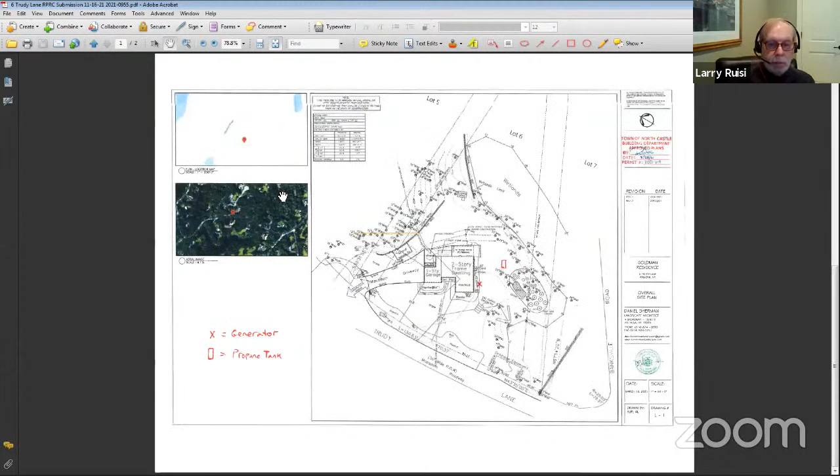Okay, so what we are talking about here is a new generator at the X and a propane tank with the rectangle. We recently approved an expansion to the patio a few months ago, I'm guessing, if I recall. So now they're asking to put the generator in. You can see the wetlands over here, so obviously both these items are in the buffer. I don't have any real concerns about it. The generator has to be suitably screened. They have to mark the distances to the setbacks to make sure it complies with the town code. But given the limited impact here and that it's lawn and we approved the patio, we should talk about what the approval authority should be for this wetlands permit.

I think it would be an administrative wetlands permit, but George, do you have any thoughts or comments on this one? Well, we've been fairly accommodating on these matters - there's such small intrusions. And I guess the question is the propane - they just rest there, is there a platform, is there a concrete padding, what do we do with it? I believe usually they put it on a concrete pad, but yeah, I would assume that would be the case. Okay, they're not buried? Some are buried. Here they didn't say it's buried, so I'm assuming it's not. But the impacts are relatively the same - if they bury it, it gets buried, if it's on top of the ground, it's there. Either way, I think it would be acceptable.

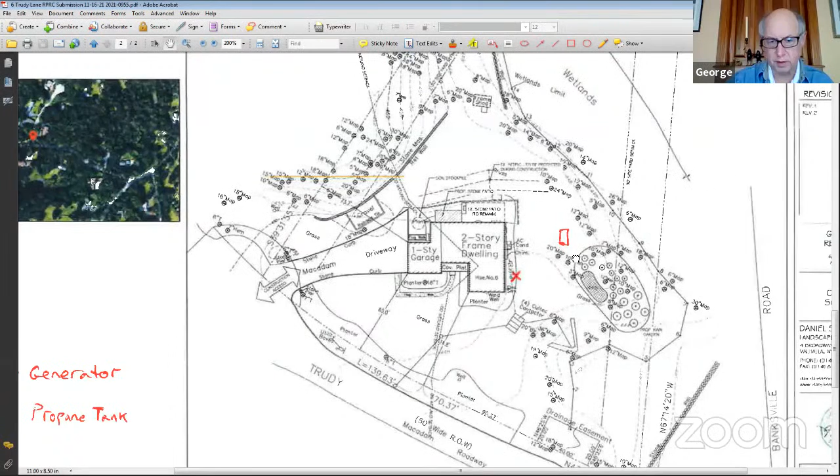Okay, and the distance from the pad, the tank to the generator itself and the house? Approximately, I guess the tank is about 50 feet to both, and then the generator is a few feet off the house, like 6 feet - is that the code, I think? Yeah, I asked them, they have to identify what that distance is, but yeah, that would be my guess. Okay, well given the lack of enormity of this project, right, I would say we should go forward with it, with an administrative wetland permit. And with the building department? Yes.

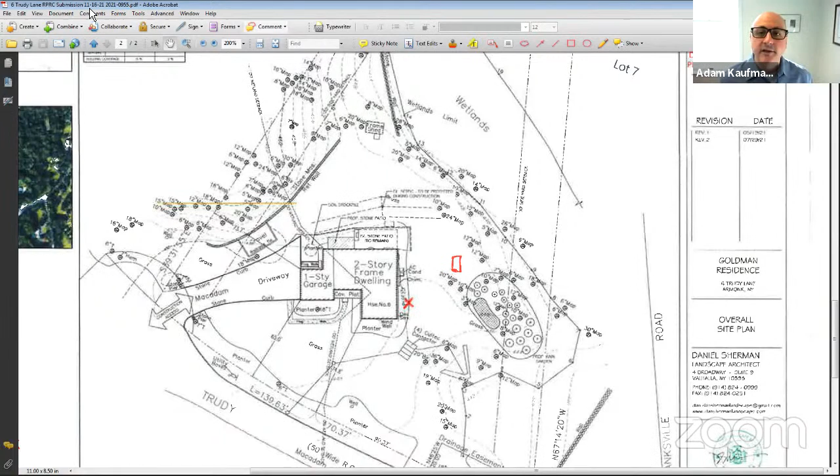All right, next is 18 Windmill Place for a pool, and we have Alan Pilch here. Yes, so let's let Alan in. Alan, you're up - you're here for 18 Windmill, right? Yes, I am. Okay, great.

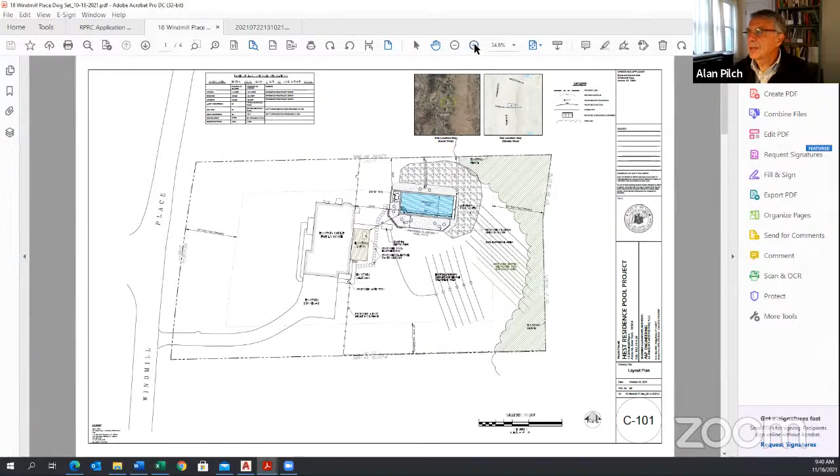So do you have the plans that you could share with us? And if you do, take the committee through what's being proposed here. Yes, great, let me share screen. Is that visible? Yep, okay. So what's being proposed here is a pool, just in the rear yard of the property. I'll just expand this a little bit.

A pool is being proposed in the rear yard of the property, surrounded with a patio. The pool itself is 20 by 50 feet, and you can see the pool coping. A spa is also being shown on the plan, along with a grass area. That's the setback line, set 30 feet from the property line.

We're showing an existing walkway from the single family house to the deck, and a bluestone paver walkway set onto the ground to provide access from the existing bluestone walkway to the pool. There's a small retaining wall that will also be constructed here, only a couple feet high. There's a septic tank here, and the existing leaching system is here - this is the 100% expansion area. That's pretty much what's being proposed.

I'll show you on the second sheet the grading plan for it, showing what's being proposed. There's a short wall here. Some of the material removed from the pool in order to construct it will be placed on the east side - Windmill Place is on the left. We are providing a slot drain around the perimeter of the pool to pick up the runoff and convey it down to chambers in a brushy area of the property.

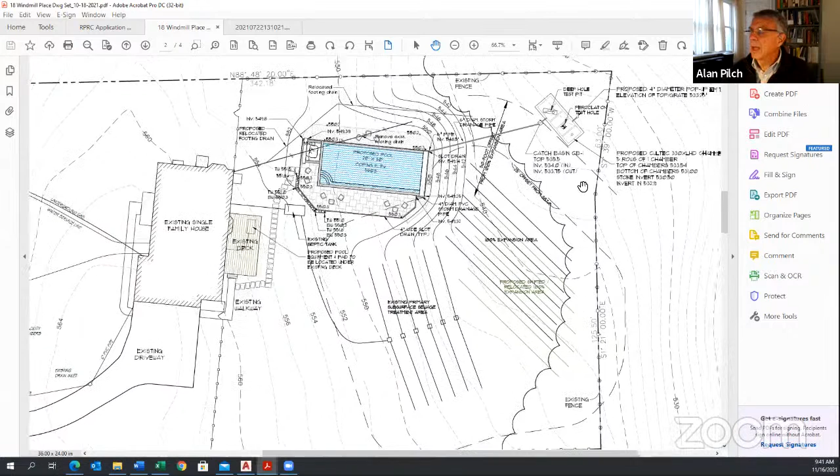Last week we conducted a deep hole test here and found very good soils, and we're conducting a percolation test on Friday. That's the plan, so that's really it - another pool project, of which I'm sure there have been plenty. That's what's being proposed here. There's no changes to the house being proposed at all.

No changes in the front yard. It's all the activities occurring in the back.

Alan, is it heated? Is the pool heated? Because I don't see a propane tank anyplace. It's a good question, I'll have to ask how we're going to do that. I presume it probably would be.

Right now we're showing the equipment underneath the existing deck - you can walk underneath that. There's so much grade change from here; the deck is pretty high compared to the house. But that's where we're showing the pool equipment pad. I'll ask that question about the propane tank, I presume it will be needed. If that's the case, we'll show something probably in this location here.

Are you taking down any trees for the propane tank? No, it's actually in a lawn area where it's completely lawn. You won't need to take any trees down, Alan, for the infiltrator? I don't think so, really - it's kind of a brushy area with trees surrounding it, so I really don't think so.

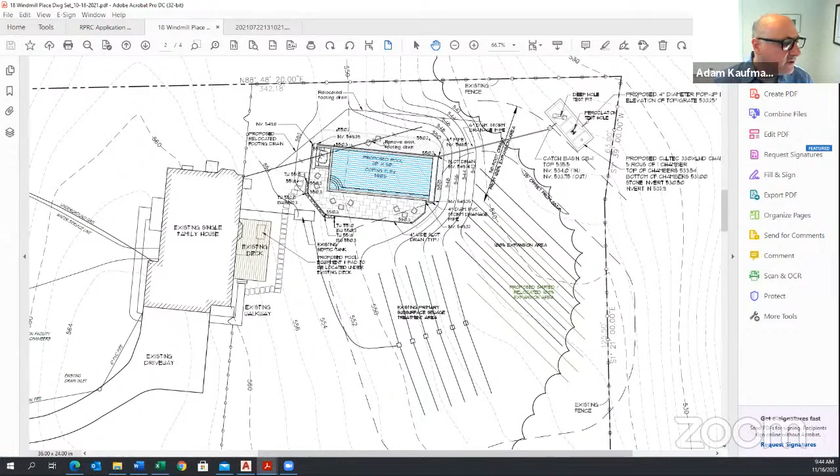Okay, what happens - you know, why don't you stop sharing and I'll just show some pictures of the property so the committee can understand.

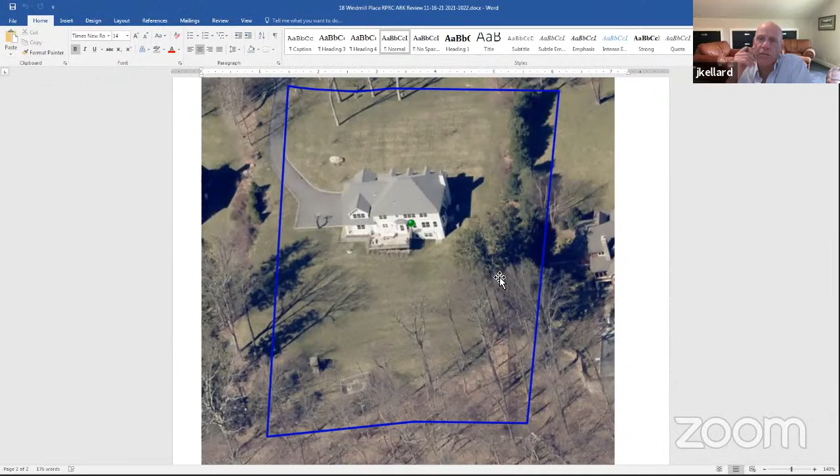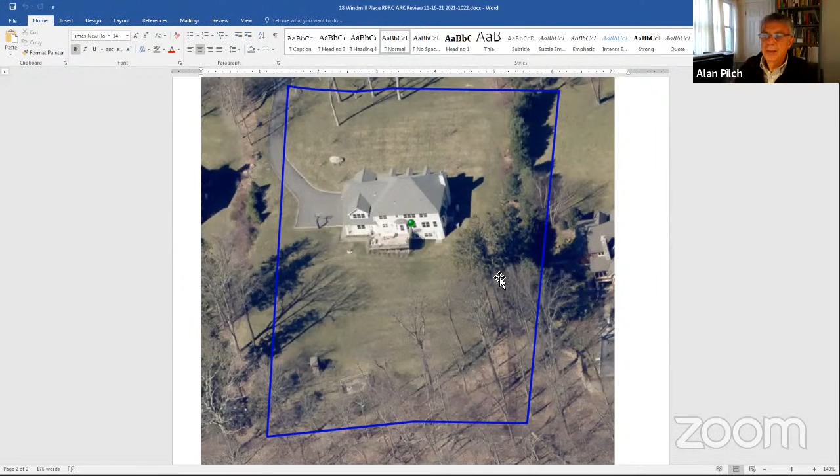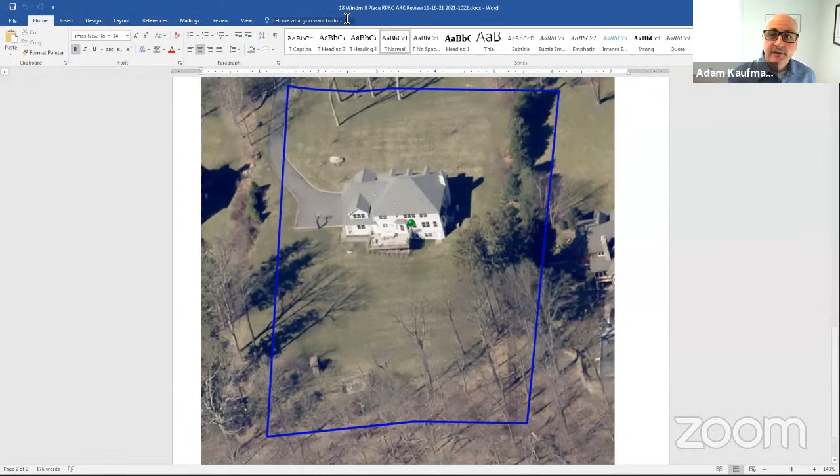Next we're moving on to Delwood Farm Way. I see that they're also waiting here, so we'll get them in here. Okay.

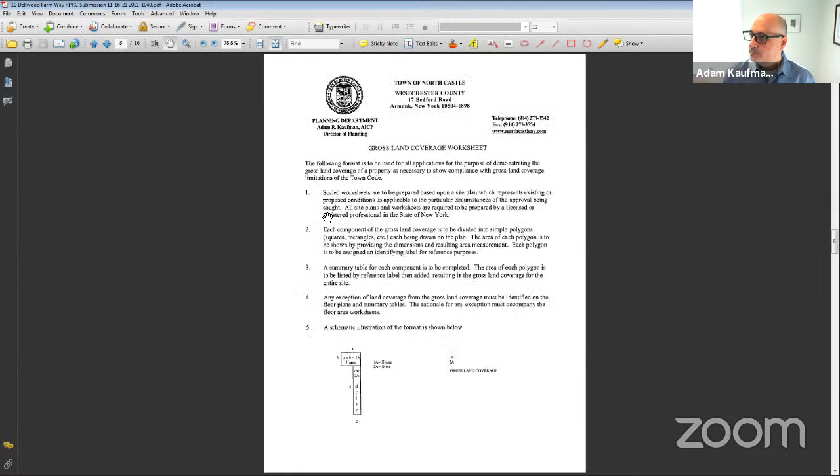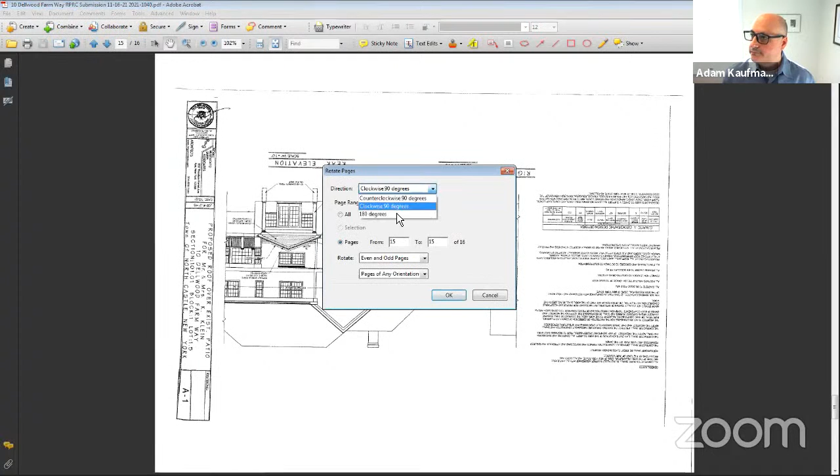Ah, okay. All right, Charlie, let me have Mark's drawing please. Okay, so that's essentially what's being proposed: lower level, covered porch over an existing patio. Correct.

It's going to have 2 columns, and the rest will be attached to the main house. It's going to be in line with the existing deck, and I think it's like 12 by 14. It'll be open. The only thing we might do on one side, the porch side, is a hanging partition for a flat screen TV that's not on that print, but basically it's just open air, a gable end with the 2 columns.

Yeah, I don't have any major issues here. I have some technical items on getting an updated site plan, showing the setbacks and getting land coverage addressed. You know John, I don't know if you noticed, but there's some improvements to the rear of the house in terms of the terrace that weren't on the original site plan when we approved the lot.

This was part of the Hammond Ridge subdivision, so I don't know if there are any stormwater implications there, but whatever.

As I saw it, the roof was going over an existing patio. My point is that patio was never reviewed at that size. At one time it had some treated lumber, 6x6s, and stairs that rotted away, so we basically recreated what was there, but we did make it a little bit bigger. It was during the time of COVID, and that's basically what we did there—we also did some shrubbery and stuff. It doesn't go past the existing porch, and it's open air.

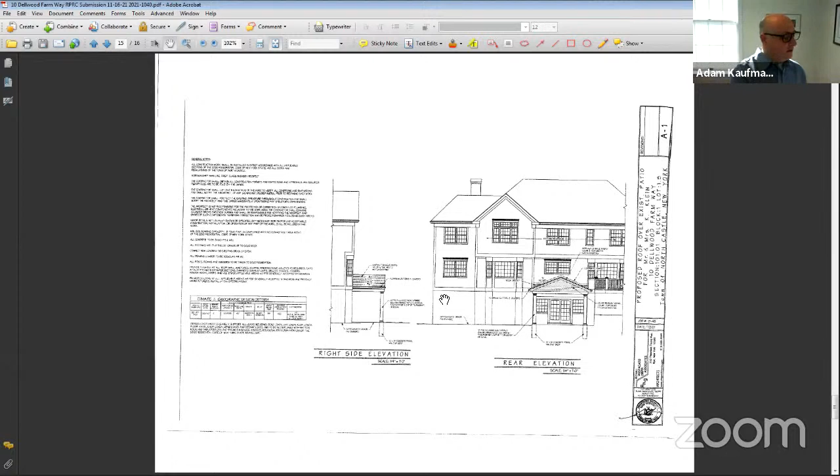Hold on there, how do you turn this off now? It's all right, I'll put you back. My tech skills aren't that good. All right, good, so we'll just wait for the building department.

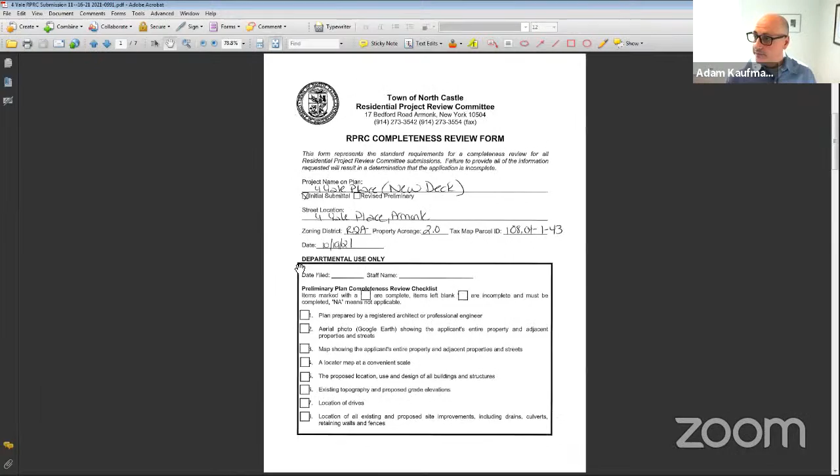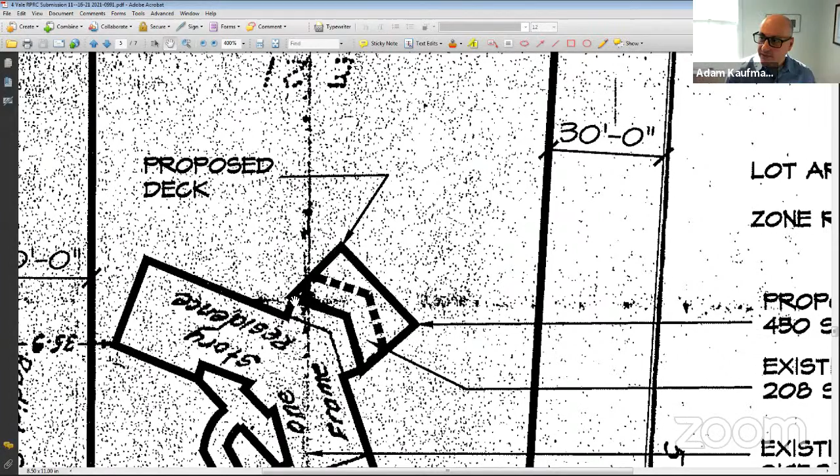So what we have here — let me zoom in — is an existing at-grade patio represented by the dashed line. They want to eliminate the patio and put in a new deck, but it gets a little bit larger and there are some grade changes, so this becomes a deck rather than an at-grade patio. I don't really have any issues with what's being proposed. Let me just pull up...

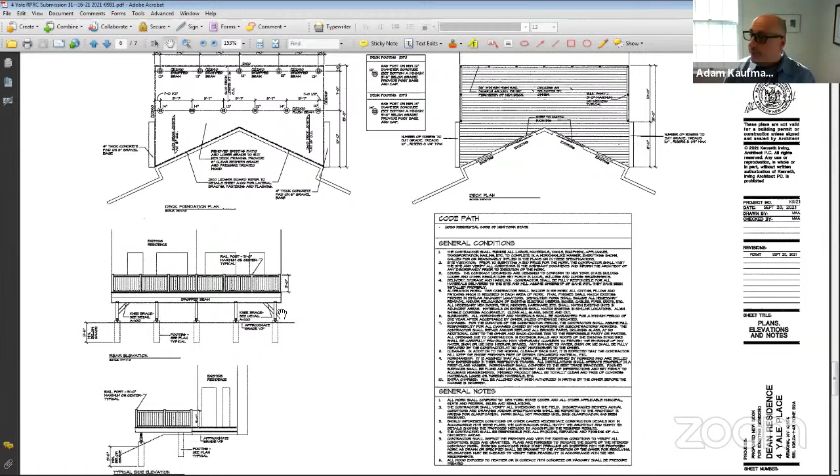It did look like it was in the wetland setback — local, and possibly state wetlands. Exactly, state and local. The proposed deck is slightly larger. RPRC should determine the appropriate approval authority for the likely required local wetlands permit, and possibly DEC. I have some technical comments on preparing the plan, but we need to determine how this wetland permit should be reviewed.

I don't think it's a significant wetland impact since we're only talking about the footings for the deck back here, but you guys should discuss it. It looked like they only had 11 sonotubes they were putting in. How do you feel about that, George? It's really in your wheelhouse here. I love sonotubes — if that's all there is, then I'd go forward with it.

I'd say, given the sensitivity here, this should be an administrative wetlands permit that John's office reviews just to make sure everything is okay. Is there some consensus on that? I'm fine with that. Okay, so then I'll make a motion: send to building with an administrative wetlands permit, reviewed by the town engineer. I'll second. All in favor? Aye.

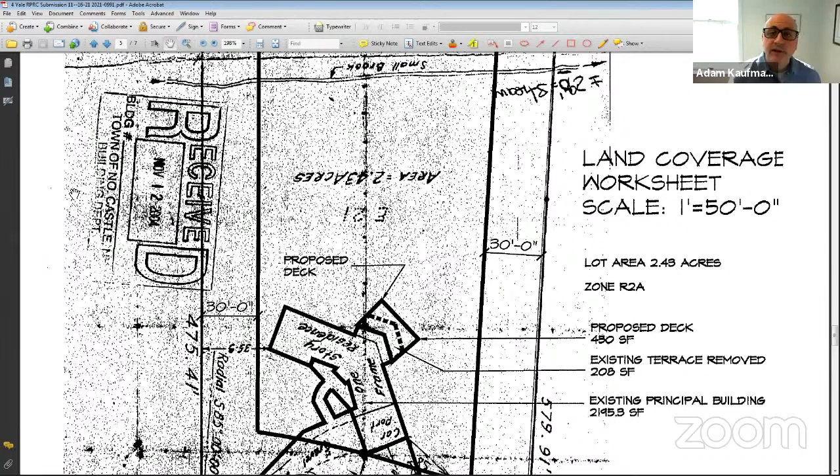Okay, great. All right, let me stop sharing. The next item, 2 Whippoorwill Crossing, has been removed from the agenda. This was for a tree removal. The building department went out there and determined that this was a hazardous tree, and hazardous trees do not require the issuance of a tree permit, so they'll be able to take that down.

The next item we have is 135 Nethermont. I see Michael is here — we'll let him in. This is a very straightforward application. Michael, hi. All right, let me pull up 135 Nethermont.

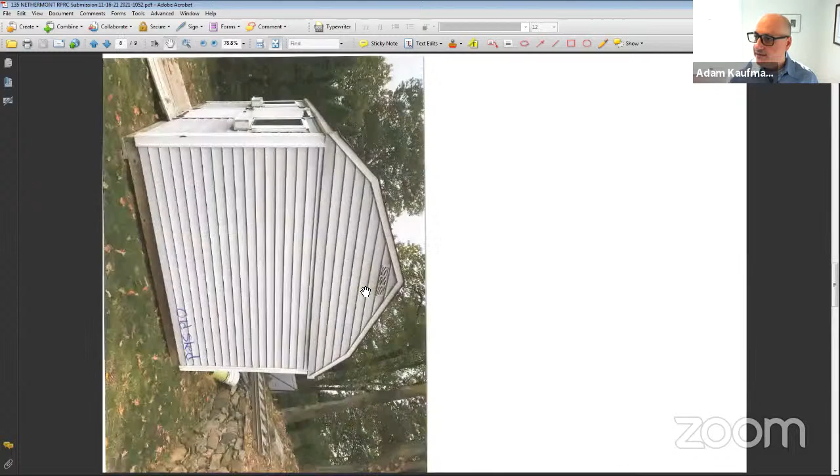So what we're talking about is replacing an existing 10 by 12 shed with a 12 by 12 shed. That's the existing shed, that's getting removed, and then the new shed is going in the same place — that is 12 by 12. I don't have any issues with this at all. Any thoughts or concerns from the committee?

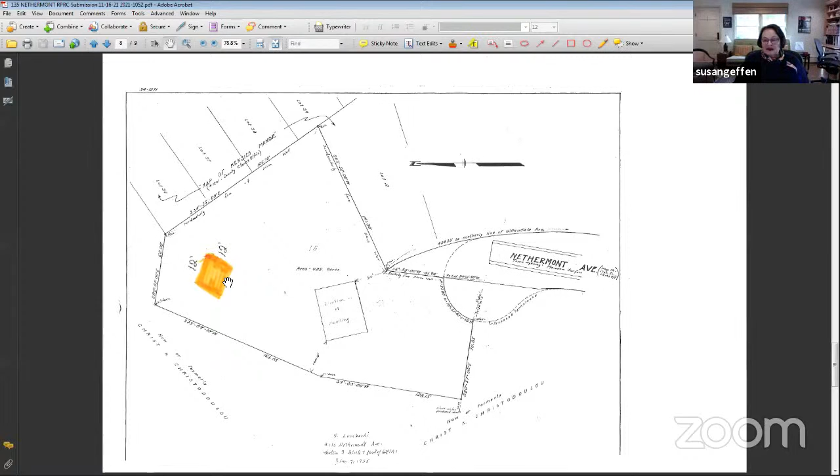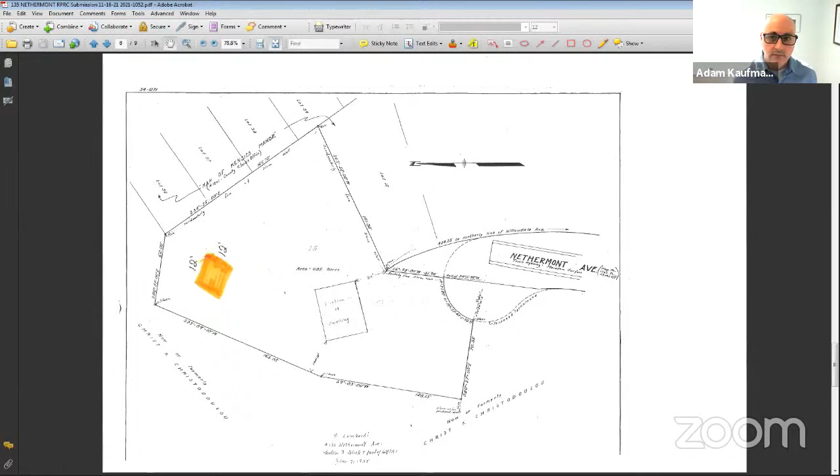Is it on a pad, on a concrete base? I don't think it is, but let's see. Yeah, no, it's on wood. Will the new one be on wood as well? I'm assuming we don't have any information to the contrary. I don't know, Michael, if you want to speak to that — doesn't look like his microphone's connected.

Is that significant to you, Susan? No, okay. Adam, there's no setback issues. We're going to have him modify the plan to show the setbacks, but it will have to comply, and it looks like it would. This is in a district that doesn't have large setback requirements. Oh, Michael's trying to connect now, so let's give him a sec.

No, all right, didn't work. You know what, Michael? I'll put you in the waiting room and then I'll let you in again. Maybe sometimes that resets itself. So hold on, I'll try again.

Yeah, I don't think we're gonna get to hear from him. But committee, any concerns on how to move this forward? No, all right, then I'll make a motion to send this new shed replacement to the building department. I'll second. All in favor?

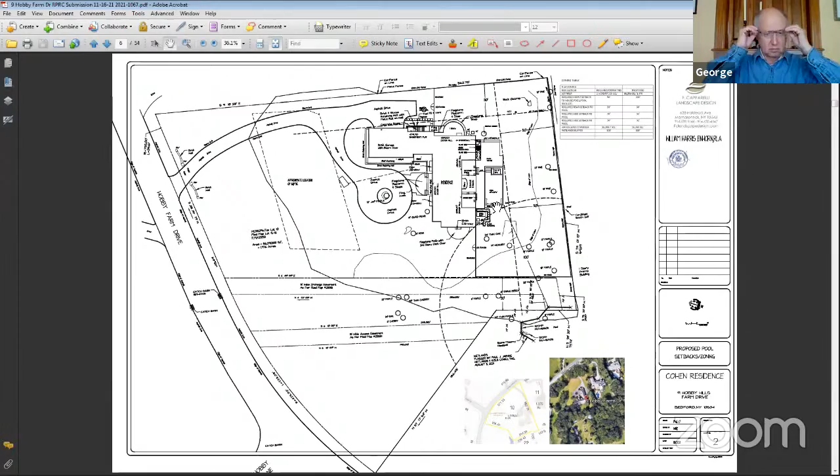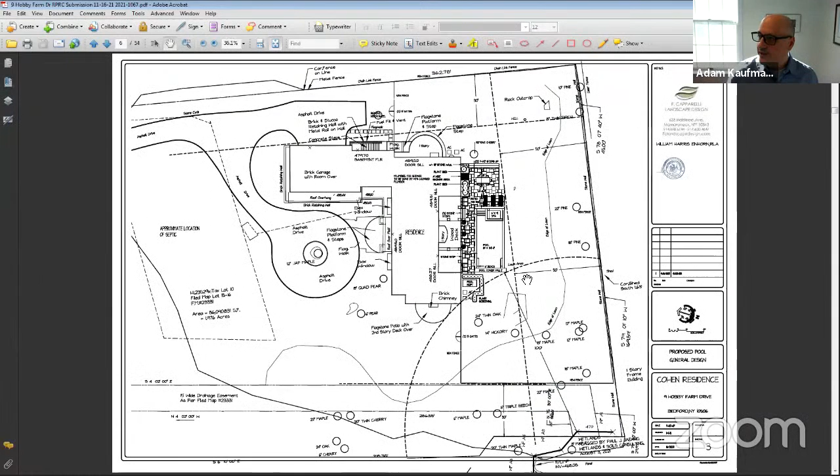So basically, new pool and spa tucked in behind the house with a patio. There's some topography going on in this back corner here, but this fits in nicely back here. You're staying out of the wetland buffer, which is off-site and extends right to this corner here. So, you know, Bill, you've got a plan that shows it in the buffer, so just take care of that after the fact.

Which one? This one. Oh, I don't know. I don't know what happened on that one. Yeah, there, no, I figured as much.

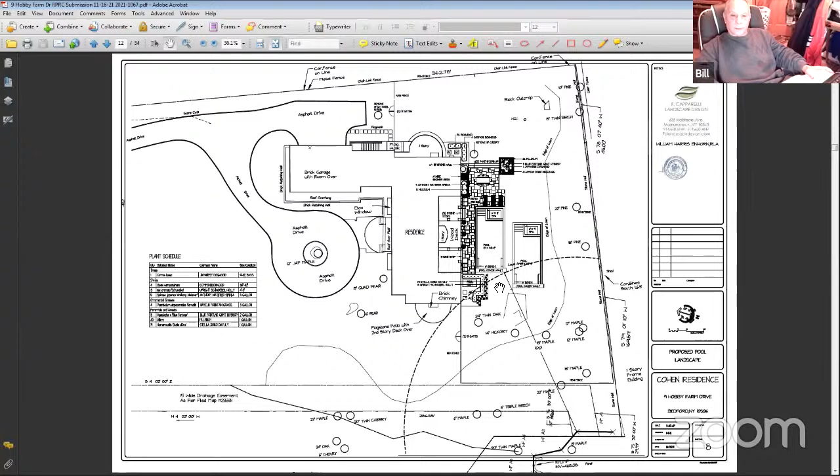Let me see - any trees that need to come out? I don't think so, right? There's on the corner of the house right up here, there's an old ornamental cherry. It's way too close to the corner of the house. Oh, I see, the remove 18-inch cherry. Got it, yeah, okay, yep.

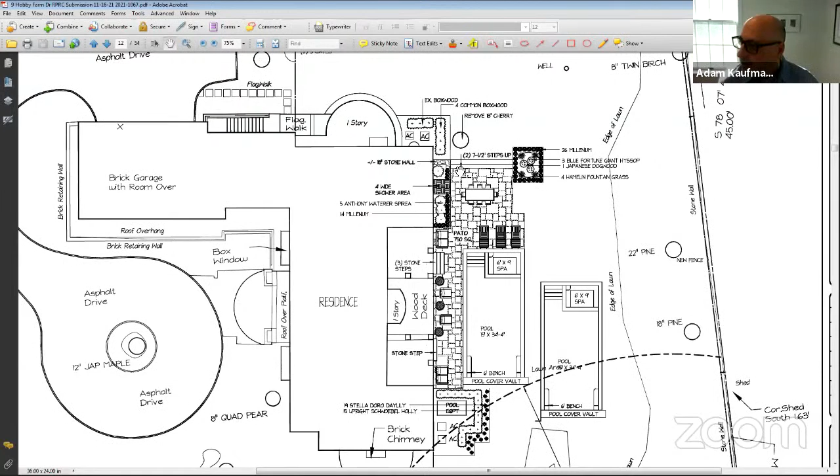So that's gonna go. And then there's a witch hazel shrub over here. Yeah, but we don't care about that. It's just blocking the driveway. That's the only tree that's gonna come out. Okay, so 18-inch cherry tree removed. You don't actually even, given where that is, I don't even think you need a permit, but we'll put it in here just so there's no confusion.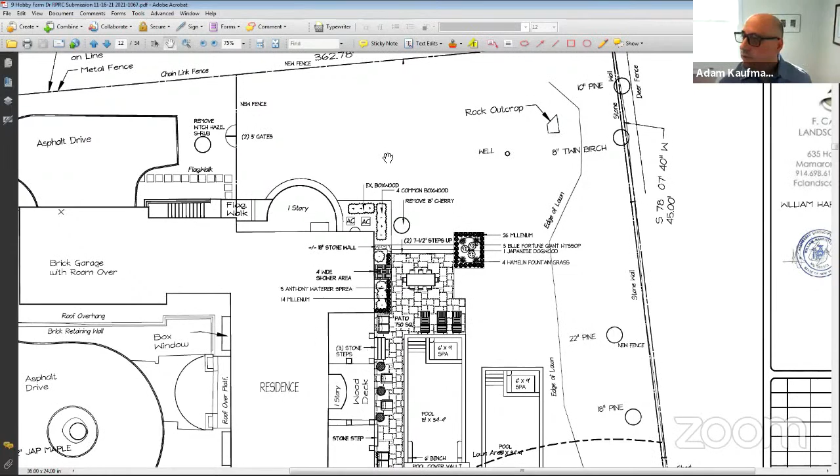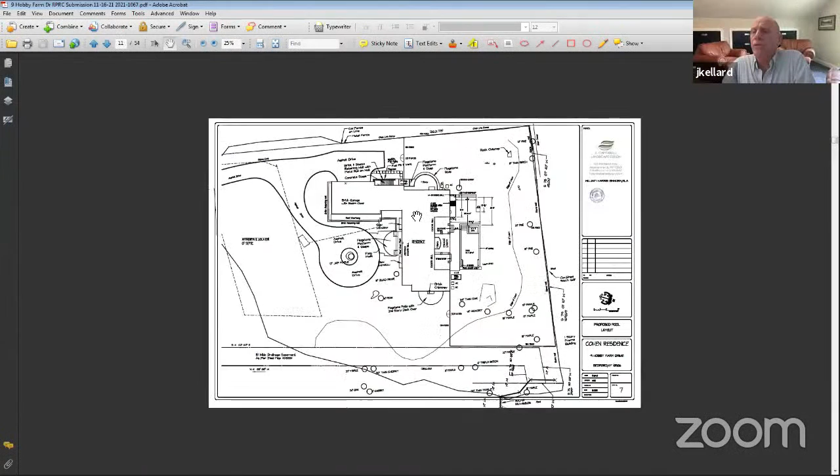Any thoughts from the committee on this plan and what's being proposed here? I don't know how this pool's gonna work when they backwash or drain - where's the water going? Bill, can you - well, there was an infiltration system proposed. Yes, if you can go to - which plan? Keep going, it's the engineer's plan. Hudson - yeah, yeah, that's Mike Stein's plan.

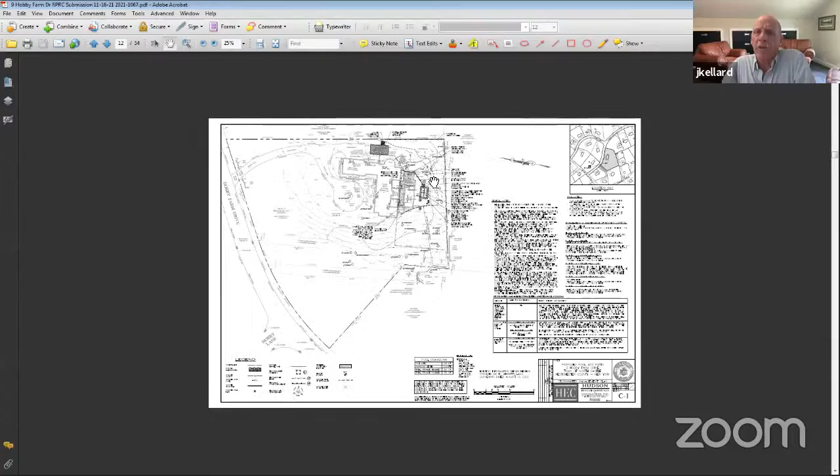It was well designed. He just has to put some dimensions on there to confirm that it has the setback off the well, which it appears to have - it just isn't dimensioned. So what's gonna happen is - if you could scroll down just a little bit - okay, there's gonna be a pipe from the equipment here. So when they backwash, it's gonna go into these channel drains and then tie into the system over here.

Okay, does that work for you, John? Is that fine? Yeah, I didn't see - now I see where he's pointing. Yeah, I looked at this plan. It's well done, it's a well-prepared plan.

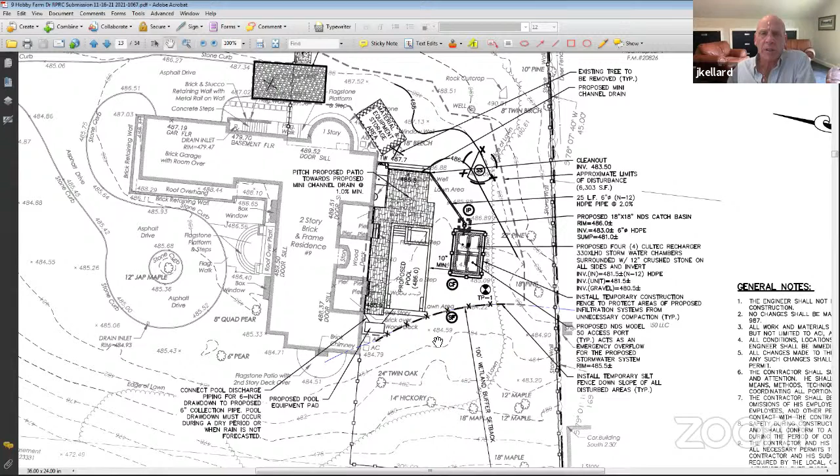Thank you. We just have to verify the test results and the soils, the perc tests, and some setback issues - they were part of my comments. But I don't see setback - between the pool and the infiltration you're talking about? No, between the infiltrators and the well. It looks like he has plenty of distance, I just want him to put a dimension on it. Looks like he has his 50 feet, which he's gonna be required.

Yeah, you know, we should just talk for a minute though. So that pool is right at the 100-foot buffer line. Not likely you're gonna be able to build that without going into the buffer. So if you need a wetlands permit, we should talk about the board's concern about that and how it should be processed. It would be a very minor impact - it's all lawn over there. So if it's required, is the committee okay with it being processed as an administrative permit?

I am. Yeah, okay. Everyone else, that's okay? Yeah, good. All right, anything else does the committee want to discuss?

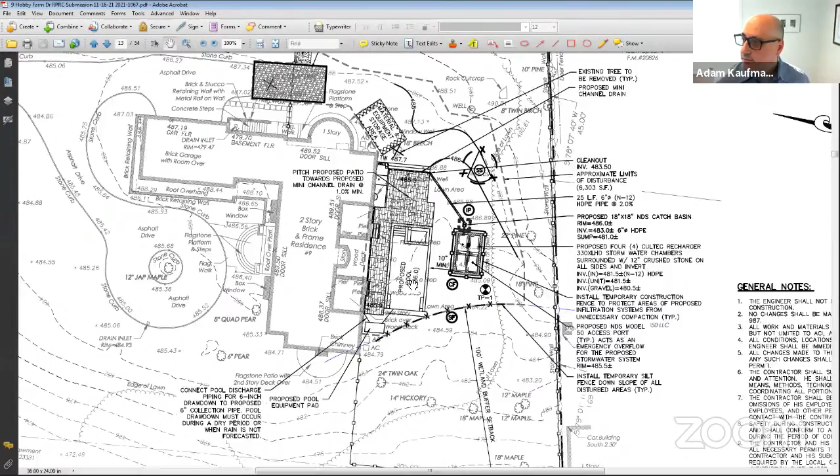Pool heating equipment, has that been put in there? Yep, right here. And we've got a detail of that unit. Somewhere here, it was included. All right, here it is. Right, this is the heater. That's propane, correct? Or do they have natural gas there? Propane. Okay.

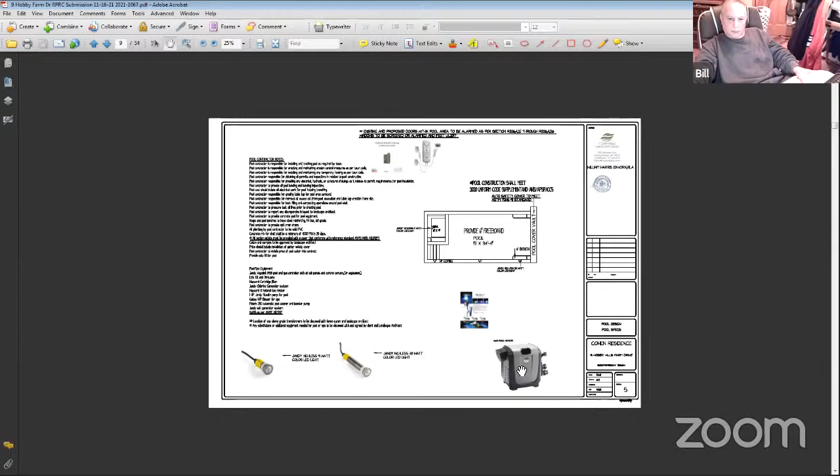Well, I'll make a motion to send this to the building department. I'll second. Second. Okay, George, all in favor? Aye. Aye. All right, Bill, looks good.

Nice project. Thank you. So what do we do next? So I will put my comments together as well as the comments from the town engineer. That will be in the letter of determination, posted later today on the town's website. Then you will address those comments and submit to the building department. Okay, sounds good. All right, take care. Thank you, guys.

Next is 9 Quaker Meeting House, which was on an earlier RPRC. We had them come back and address some comments. So let's let them in.

Okay, Paul, you're with us? Yes, everyone can hear me? Yep. All right, let me pull up the plans and then you can tell us a bit about what's happening out here. Sure, just give me a second. No problem. Share screen.

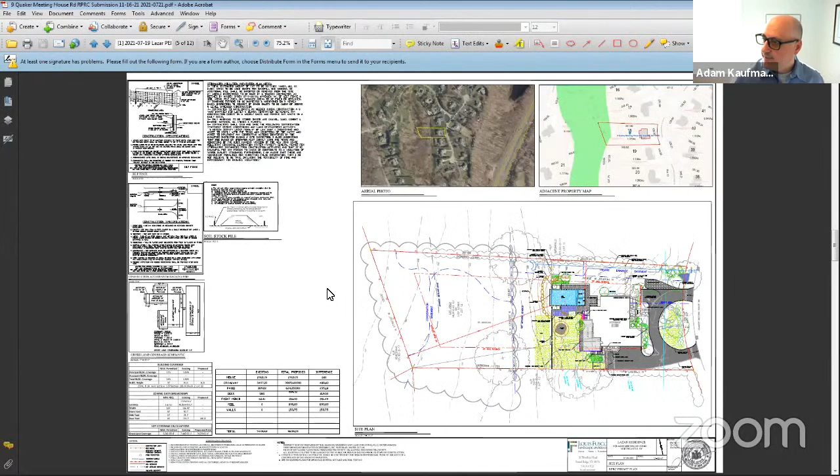Okay, so this was once before the RPRC and we asked you to address some comments and come back to us, which you've done. Just so people understand, we're talking about the Leisure Farm subdivision, building a new pool and some retaining walls in the back to get this in here. You've addressed most of my comments from the last time, which is great. I don't know, John, if there are any major issues left for you.

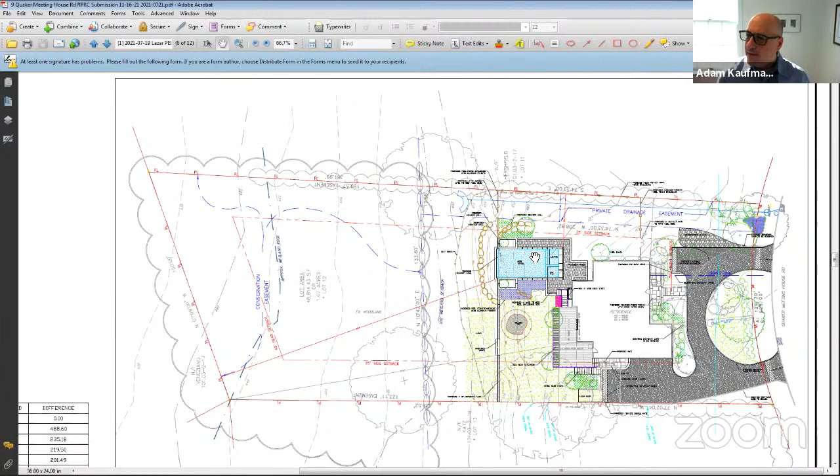No, the major issue was the wetland line, and that was resolved. The applicant went out there—we saw a line that was much closer to the house on the general GIS, but after going out there and the applicant locating exactly where that line is, and having the town confirm that, this is outside of that line. So that's a good benefit, and that was the major issue for the RPRC when it first came in. Correct, it wasn't clear whether this was significantly in the buffer or not. So now that it's not, and we have those facts settled, I don't have any major comments here.

I don't either. There's just some technical issues that have to be resolved during the building permit process. Yeah, my major comment is you're now within 5 square feet of the maximum amount of gross land coverage, which is fine as long as you're below, but just keep in mind there's no wiggle room for the future here. Yes, we've gone over that a number of times with the homeowners and being careful with items, so they're aware of that.

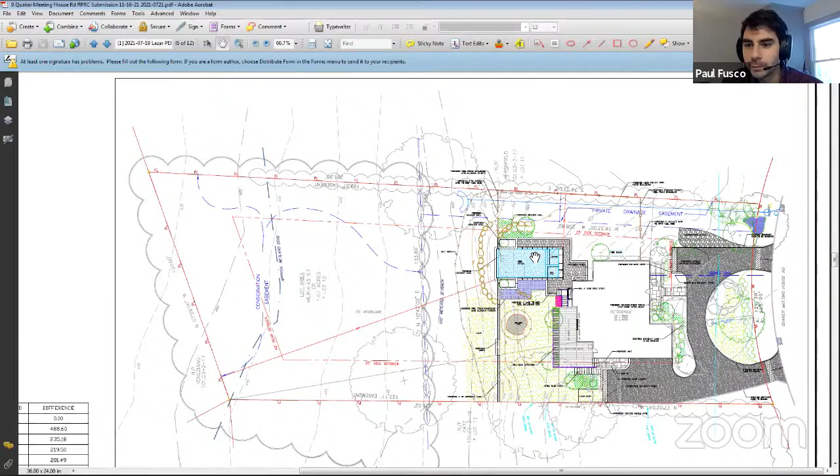And I know one of the big items was the drainage. We did the on-site review, test holes, and test percolation tests. The engineering drawings are basically finished—we just couldn't get them in, but I wanted to get this over to you because I know that's kind of the next phase, since the big concerns were the wetlands line and making sure we're okay there. The other item we discussed was the deck portion that is within the side yard setback.

As needing a variance, so as per our comment letter and response letter, we note that the homeowners are aware of it and they would like to proceed with that. It sounded like, in speaking with your office, Adam, and the ZBA, that they can pull the driveway permit separately while we go to the ZBA to hopefully get approval for the expansion of the deck into the side yard setback. Yeah, what driveway? What do you mean by that? The modifications to the existing driveway?

Well, normally the building department would issue this all as one permit. You're not going to build this right now, this time of year, right? No, because the driveway—we couldn't do any asphalt work right now, so they wouldn't do any of that. It may just be waiting for it. When I spoke with buildings, they said it wouldn't be an issue to pull, because the deck could be its own separate structure, similar to the pool permit—they could separate them if we wanted. All right, I agree with you, at this point in time that's just fine. Just work it out with the building department. Perfect.

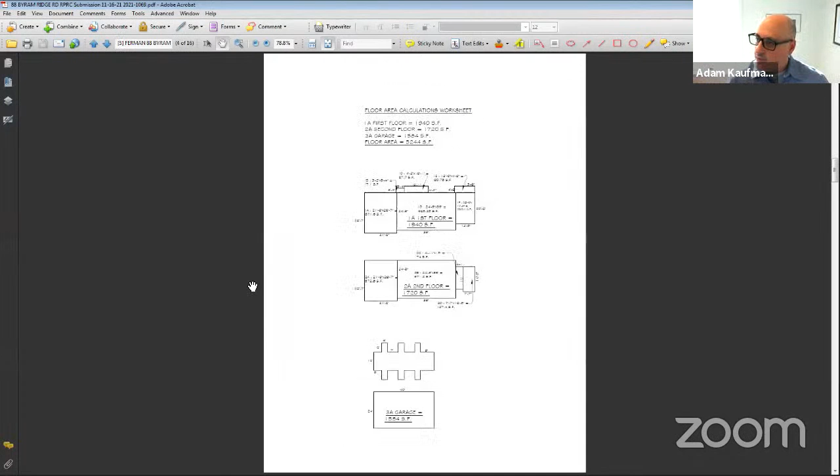So you're removing a piece of the house, renovating the entire thing, and taking the 1-story out and replacing it with a 2-story. That's right, it's basically the garage, an old single car garage attached to the house now. Our plan is to turn that into interior living space and then add a second floor to it.

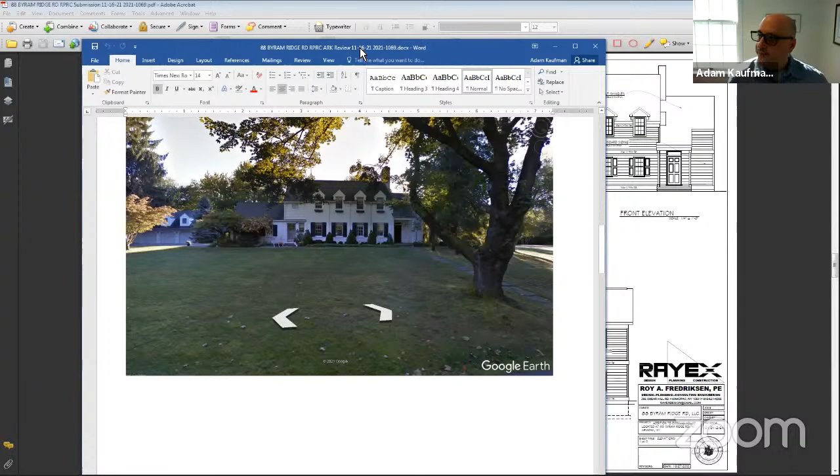Yeah, let me just show the board what's out there. So this is the house as it exists today. This is a separate detached garage, but this is the main focus of what's happening. Correct, and here you can compare that to this elevation.

So you're moving a bunch of things around here on the front elevation, at least the one from the street. What are you doing to that roof line, Joseph? It's hard to tell if that's actually getting taller or not. The main roof line is just extended into the new gable on the left. Okay, so it's just the elevation itself. Yeah, it's because you're lower down on the street. Yeah, understood, I just want to make sure that we're clear.

What's the front of that house, stucco now? It is, yes. And what are you proposing to put on? The stucco is going to remain, and the addition will have pre-painted white Hardie board. I see, okay, that's not entirely clear from this elevation. Yeah, we were going back and forth, and I missed that with Joe, that we are keeping the stucco. It actually works for this house, right? It does, it does. We went back and forth on that a lot, and I actually really like the stucco. I'm glad you said that, that was my reaction too, Seth.

We've got a representative of the ARB here too. Susan, you have any thoughts on that?

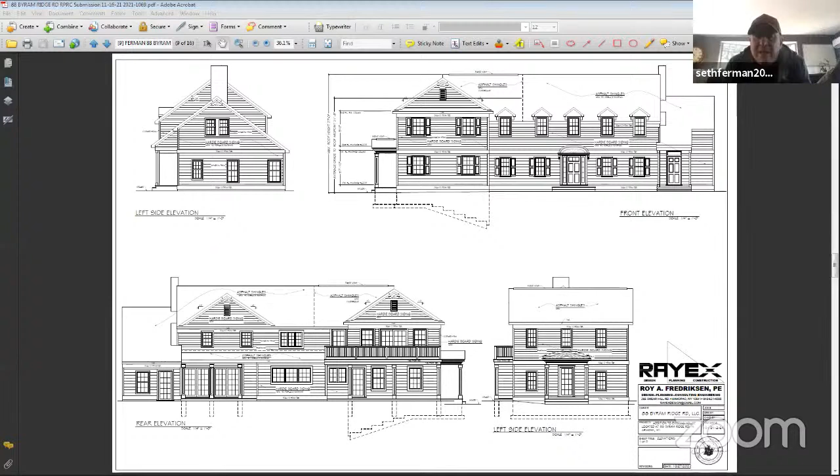So I'm just understanding the front door is being moved. Yeah, when you come into the house right now, part of what I love about this house is that it's old, which is why I want to keep the stucco, and keep the integrity of the house the way it is, but modernize it a little bit, because right now the front door is all the way on the right side, and you enter directly into a very tiny space. So I wanted to get the door centered and update the windows so the flow of the house works better. But I really don't want to change the look of the house very much because I really like it. So you're adding one more dormer.

Yes, on the existing house there's four dormers. So you're adding a dormer on the left. This house has been added onto over time. So what you're doing is making a uniform house out of it. Yes, exactly, it's a little disjointed right now.

Good job. And the colors, what are they going to be? The colors are going to be white with gray accents, some gray moldings, but it's going to be primarily a white house. And the stucco will remain white.

So the white, are you doing a HardiePlank? Yes, on the addition we will be doing Hardie board, a sort of wider board. I think we're going to do probably a 6 or 7 inch reveal.

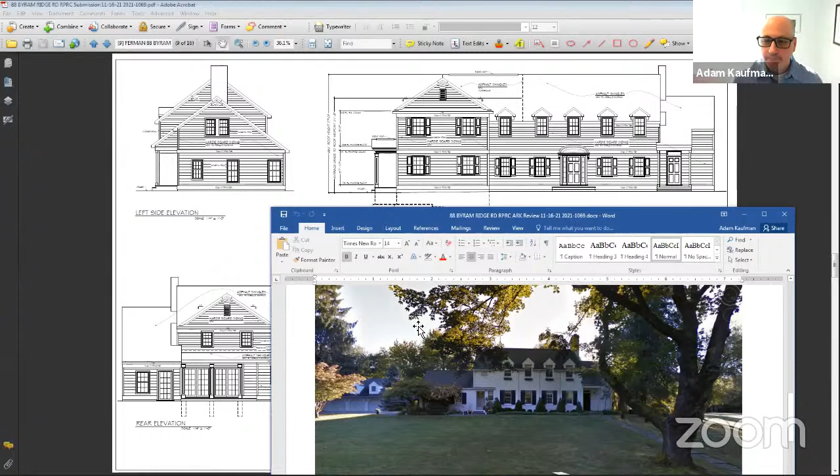Everyone okay with this plan? Yes, I'm sure there's going to be a change in the walkway and landscaping. Yeah, I'm going to add a lot of hydrangea, I really like it, so I'll be planting a lot of hydrangea in the front of the house. But the walkway will remain pretty similar to the way it is now, bluestone as it is now.

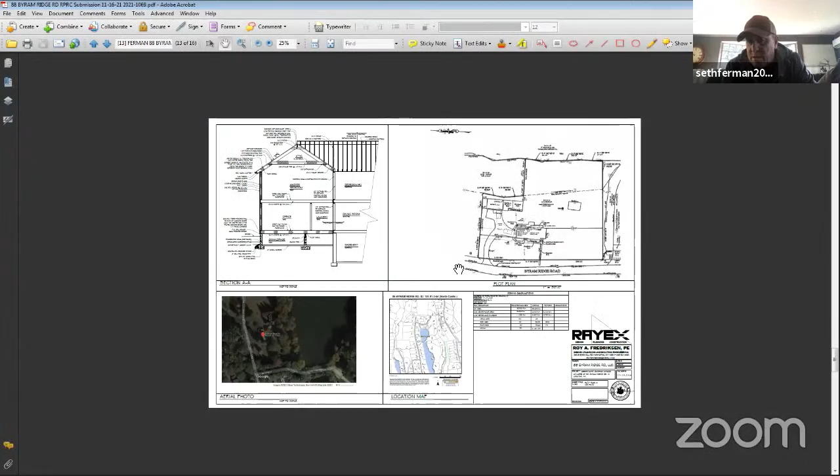It'll just be slightly altered because the front door is moving to the center as opposed to all the way to the side of the house. Okay, you should update the plan to show that if it's changing.

Is this right? If not, update that, okay? Okay, we will do that. On that plan there, there's two sections where the walkway goes into the house on the front. The one on the left was to a side door, so we're just going to shift that square footage over to the new front door.

So it should stay the same, but I just have to update it. We're not going to have any issue with it, but you just want to put that on the plan. Okay, so I'll make a motion to send this to the building department.

Great, I think that was Sue. All in favor? Aye. Aye.

All right, so we'll post these comments later today on the RPRC website. Then you'll revise the plans according to those comments and submit to the building department to get the permit. Perfect, thank you very much, everybody.